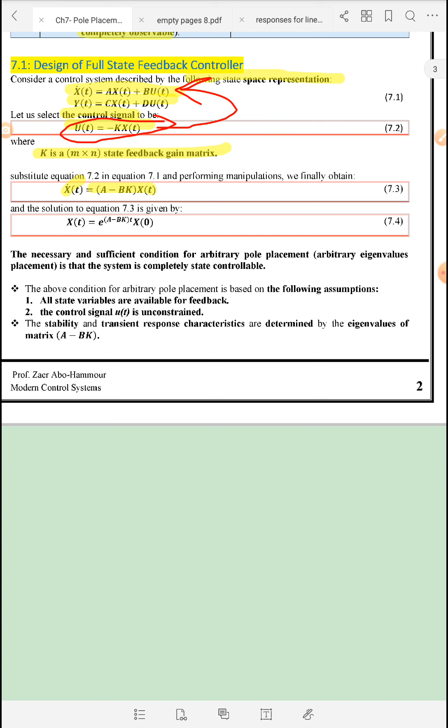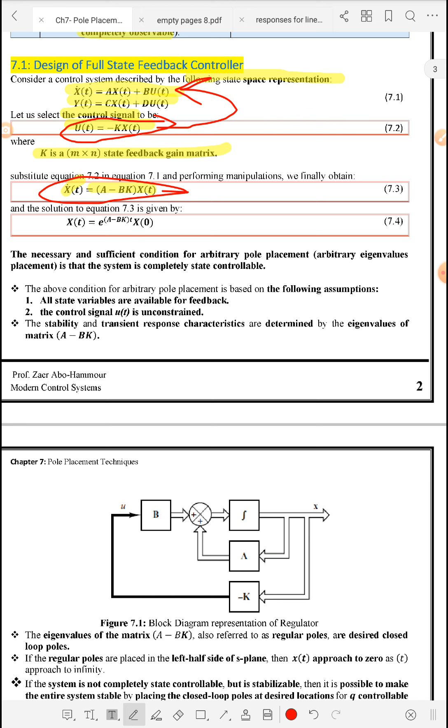So in this chapter we reached this equation: x dot is equal to (A minus BK) x of t. Instead of A in the previous chapter, we have A minus BK in this chapter. If we replace A with A minus BK, then the solution x of t will be e to the power (A minus BK)t x of 0, and the stability and transient characteristics are determined and controlled by the eigenvalues of A minus BK. Previously it was the eigenvalues of the A matrix, while here it's A minus BK. Why? Because we have assumed that u is equal to minus Kx.

And in order to perform this pole placement arbitrarily, so that you can select the desired closed loop poles anywhere in the left half of the s plane, there is a necessary and sufficient condition that the system should be completely state controllable. So the conditions that we discussed just now are based on assumptions. Number one, all of the states are available for feedback, and the control signal is unconstrained.

And this is the concept of controllability. If you remember, the concept of controllability in the previous chapter is to transfer all states from an initial value to any final value over a finite interval of time using unbounded u of t. So u of t is unconstrained or unbounded, and all of the states should be available for feedback. If they are not available for feedback, then we should use an observer.

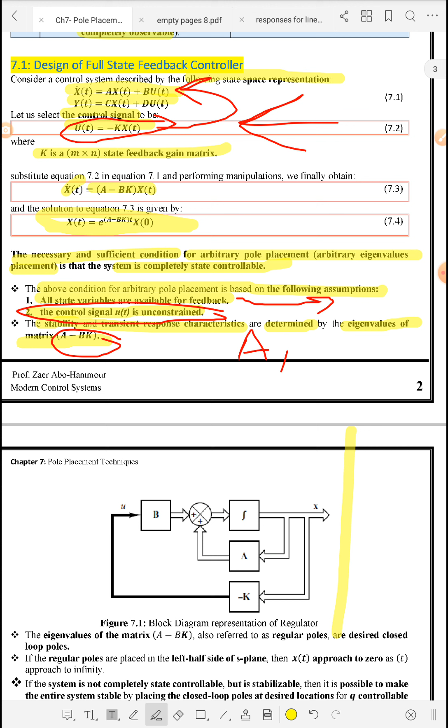And this is the block diagram of the system. Here we have x dot. So this is x multiplied by A, so here it will be Ax, and here x multiplied by K, and here u is equal to minus Kx, and we multiply this by B. So what will be the final answer? x dot is equal to Ax plus Bu, and u is equal to this value. So this is our model for the system that we assumed on the previous page. Okay.

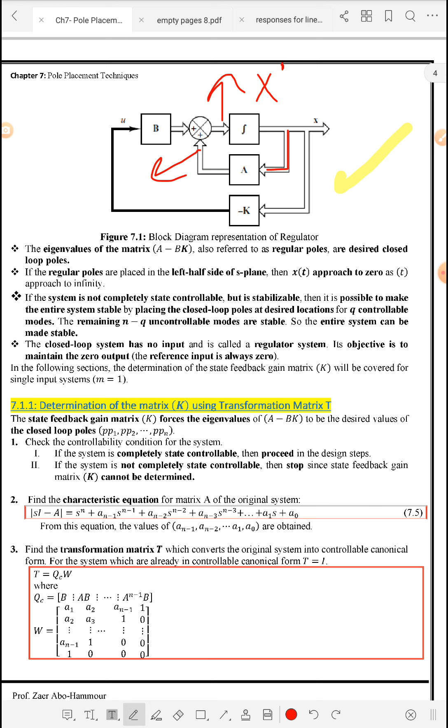Now, the eigenvalues of the matrix A minus BK, we call them the desired closed loop poles. Eigenvalues of the matrix A minus BK are the desired closed loop poles; we want to place the poles at this location. So if all of those desired poles are in the left half plane, then the system is stable, and x of t, due to initial states, will go to 0.

And if the system is not completely state controllable, but it's stabilizable, we discussed this concept, then we can make the entire system stable. How? By placing the closed loop poles at the desired location for the q controllable states, and the remaining states, which are uncontrollable, are already stable, so the entire system will be stable. And this we have discussed before in the concept of stabilizability.

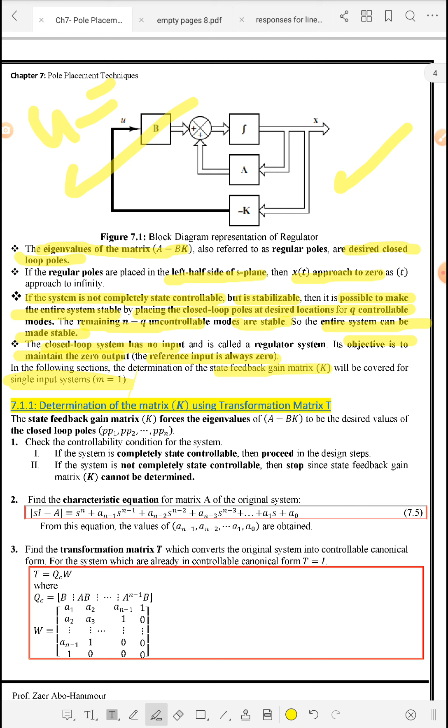Okay, and for this system, notice that the closed loop system has no input, because we have assumed that u is equal to 0, and we are considering the zero input response. So the objective of this system is that the output should be 0, and the reference, or the input, is assumed to be 0. So how can we determine the state feedback? In the following sections we will cover the procedures to determine the value of K, the state feedback, for single input systems.

Okay, so the first method is using transformation. The state feedback gain matrix K forces the eigenvalues of A minus BK to be the desired poles. So we place the desired poles from PP1, PP2 till PPN. These are the desired locations where we want our controller to set the new closed loop poles. We set those PPs from PP1 to PPN according to our specifications.

And the K value will force the old system, which has its eigenvalues of the matrix A, so that the eigenvalues of the new system will be the eigenvalues of A minus BK. In the first step, we check the controllability of this system. If the system is complete state controllable, we proceed. If not, we stop; we cannot determine K. The second step is to find the characteristic equation of the original system, the determinant of sI minus A, which will be nth order, and from it we determine all of the coefficients a0 till an minus 1.

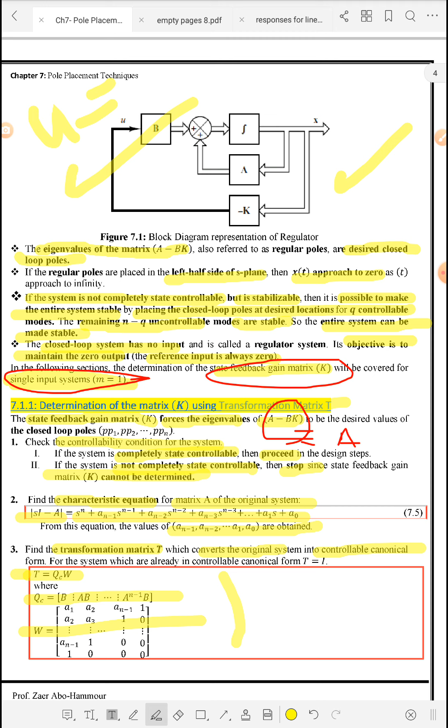In this step, we perform similarity transformation. We find the T matrix as we discussed in the similarity transformation. This is QC and this is W. I will not discuss it again. So we perform the similarity transformation that converts the original system into CCF, and we find this T matrix.

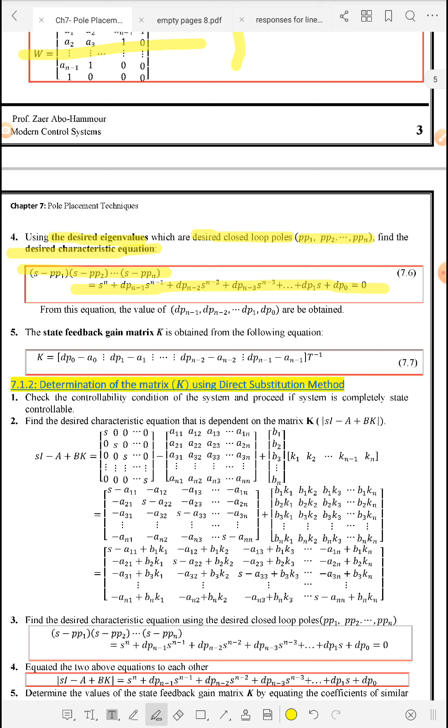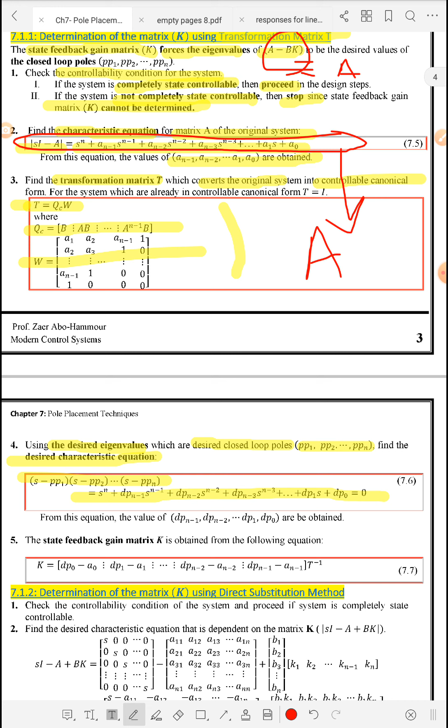In the fourth step, we find the desired eigenvalues. We have set the desired closed loop poles, which are the desired eigenvalues, and from PP1 to PPN we find the desired characteristic equation. So we multiply them, and from that we find the desired characteristic equation, the one we want. While this one is the characteristic equation of the original system before any controller, the old characteristic equation of matrix A, this new one is the desired characteristic equation after using the state feedback gain matrix.

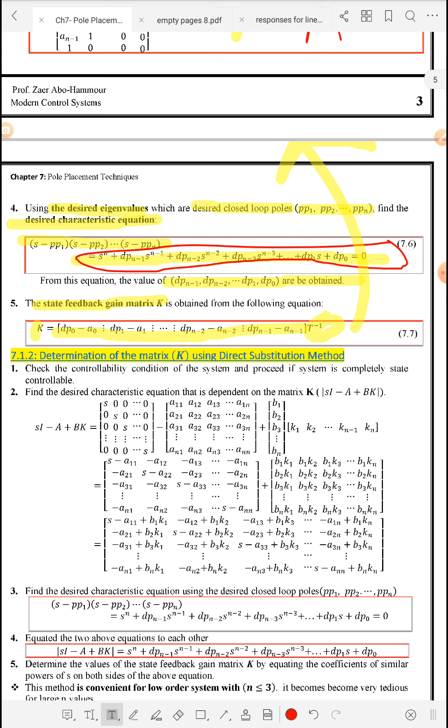And from that desired characteristic equation, we find the values of all the desired coefficients for pole placement. Finally, we find the state feedback gain matrix according to this equation: the differences between the coefficients of the desired and the original system, multiplied by T inverse, which we calculated in the previous step. So this is the first design method, based on the transformation matrix.

Now we will go to the second method, based on direct substitution. In the first step, we always check the controllability. If it is complete state controllable, proceed; if not, stop. So here, as I mentioned, A minus BK is the new system, with the new characteristic equation and new eigenvalues. We want to determine sI minus A plus BK, which will be a function of the K matrix. So this is sI, this is minus A, here B, and here K. Finally we get this lengthy matrix, and we find its determinant.

And in the third step, we find the desired characteristic equation based on the desired location of poles from P1 to Pn that we set. These poles we set, we specify. Okay, and from that we have this desired characteristic equation with coefficients dp0 till dpn-1.

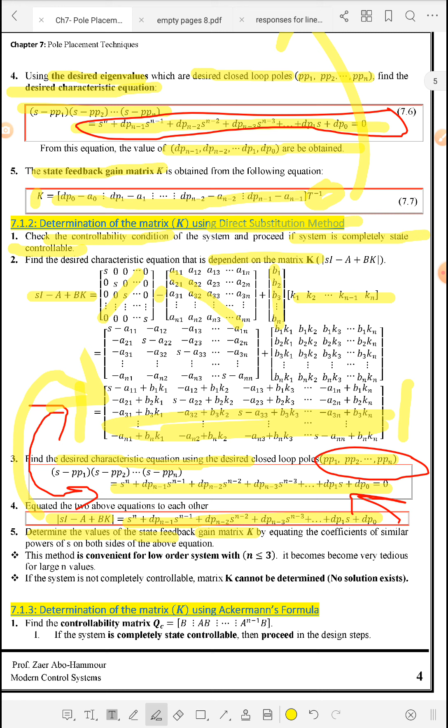And then the final step is to equate the characteristic equation that we get from this with the characteristic equation that we get with this. So here we will equate the two characteristic equations. This is the characteristic equation that we will get from here, the determinant of this, and this is the desired one from this step. We will equate both of them, and we will determine in the fifth step the gain matrix K based on equating the coefficients of similar powers of both sides of the equation.

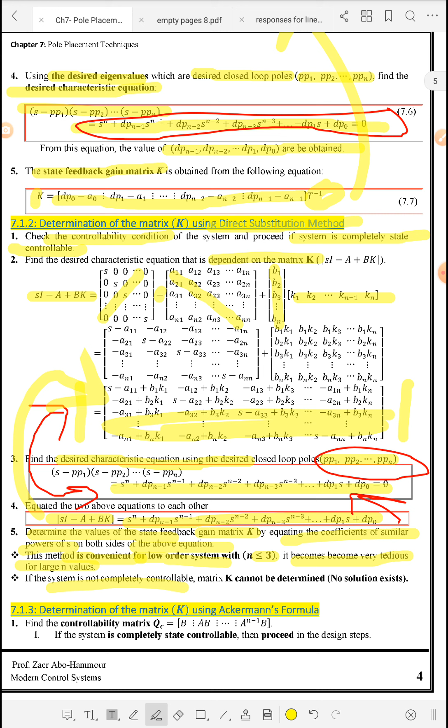Okay, so we will generate a system of n equations. The system will be n-dimensional, and we solve it and we find the unknown values for K from K1 till Kn. And this method is convenient for low order systems, n less than or equal to 3. If it is larger, it will become very time consuming. And if the system is not completely state controllable, then K cannot be determined because no solution exists. So this is the second method of determining the state feedback gain matrix.

The third method is based on Ackermann's formula. Always we start with the controllability matrix, and if it is completely state controllable, proceed. If it is not, stop. The second step, we find the desired characteristic equation based on the desired poles, which I have discussed before. And in the third step, we find a new matrix, its name is phi(A). How can we get it? It's based on this desired characteristic equation.

But we get it by replacing each s in this characteristic equation by matrix A. So each s in the desired characteristic equation is replaced by matrix A. And if we replace it, we will get this phi(A). So s to the power n will be A to the power n, and we continue till this term, dp1 A. And finally, we reach this one. This is very important: here it's dp0. We cannot add dp0 because it is a scalar, so we should multiply it by the identity matrix. In is the identity matrix of size n. We multiply the last term with In.

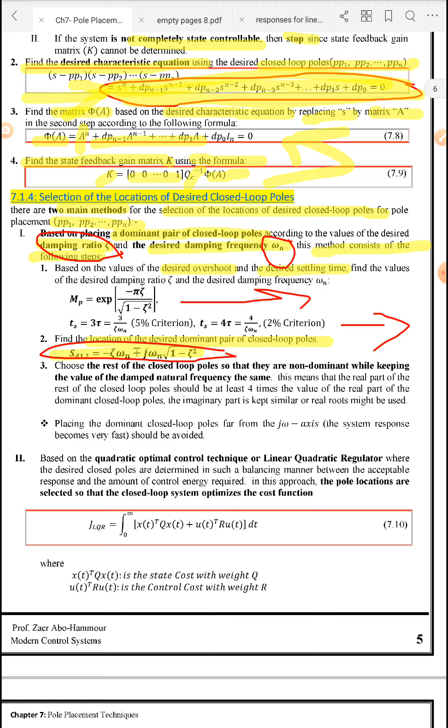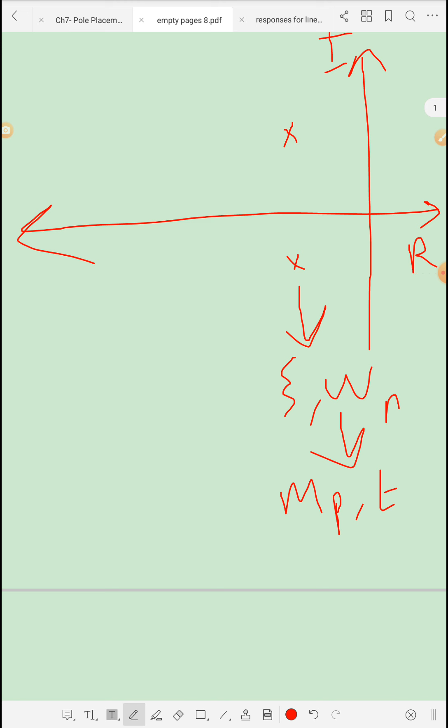So assume that our system has n poles. Assume that this is the real axis, and this is the imaginary axis. Assume that we have specified here and here the desired closed loop poles based on zeta and omega n, which we calculate based on Mp and ts. So those are 2; there are n minus 2 poles left.

How to specify them? We should find the real part of those dominant closed loop poles, and the real part of the non-dominant n minus 2 should be at least 4 times the real part of this pair of dominant closed loop poles. So assume that the real part of this desired closed loop pole is alpha. Then we might place the remaining, whether real roots or complex conjugate roots, with real part at least 4 alpha. It might be further to the left, but it should not be closer, because if it is closer, that pair will be non-dominant.

So we want to guarantee the dominance, and to guarantee it, the real part of the non-dominant poles should be at least 4 times the real part of the dominant ones. I hope everything is clear; we discussed dominance and non-dominance in the control course. So in the third step, we choose the rest of the poles, n minus 2, such that they are non-dominant regarding the real part, while their imaginary part we might keep the same.

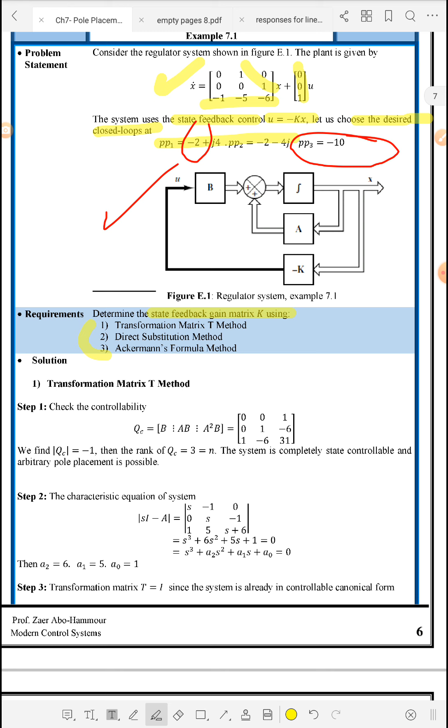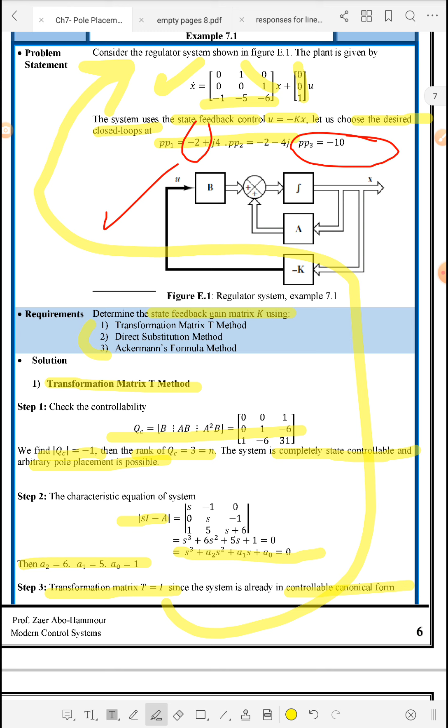The first one is the similarity transformation. So we find the QC and its rank; it's full rank. The system is completely state controllable, and we can proceed. After that, we find sI minus A, and this is the characteristic equation of the original system, and from that we find a0, a1, a2. Since the system here is given in CCF form, T is equal to I. So we will continue the solution.

So we go to the fourth step, the desired characteristic equation. We multiply s minus p1, s minus p2, s minus p3, and we get this equation, and we equate it to the desired coefficients, and from that we get them. And the gain matrix, as I discussed in the previous method, is the difference between the respective coefficients of the desired and the original multiplied by T inverse, and T inverse in our case is I, so k is equal to this vector.

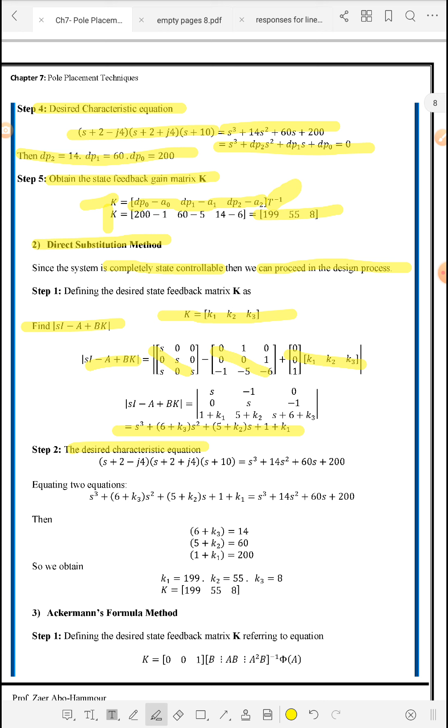So now we will go to the direct substitution method. Again the system is completely state controllable, so we can proceed. The state feedback gain matrix is k1, k2, k3, and we find sI minus A plus Bk, and we will finally get this determinant, the characteristic equation of the desired location. And the desired location is s minus p1, s minus p2, s minus p3 multiplied, and we will get this. So we will equate both of these equations.

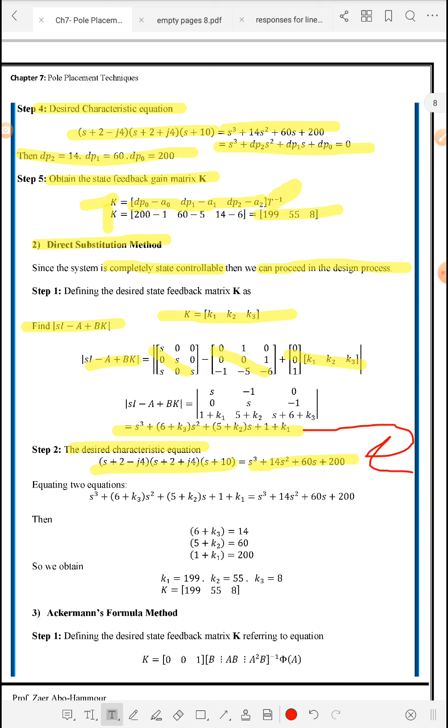So this is the complete numerical value, and this is the characteristic that contains the k's. So from this we will get those three equations, and from that we will get this k, and the k here is equal to the k in the first method. The state feedback gain matrix should be the same regardless of the method.

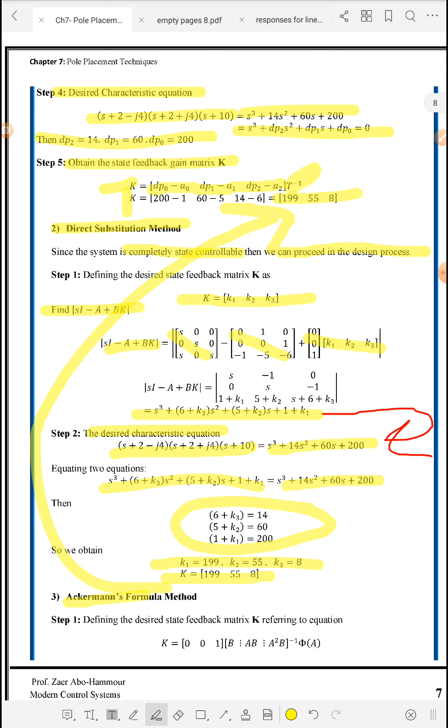So the final method is the Ackermann formula. The desired characteristic equation, as we say, we will calculate like this, and we will replace each s by matrix A in this desired characteristic equation according to this method. We replace each s by A, and the final term we multiply by I in order to be added to the matrix. So finally, we get this phi of A, and this is the QC, and this is the QC inverse, and finally we will have this formula, and if we multiply we will get this.

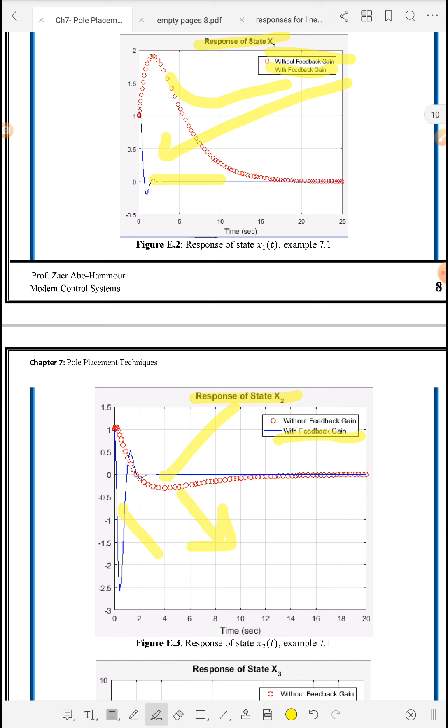So these figures are the responses of the respective states. Here state 1: this one is without state feedback, while the solid line is with feedback. As we see, it's much faster, and it's a very good response for x1. And for x2 also, this is without state feedback, and this blue one is with feedback. So again, it's much faster and much better. And if you go to the third state, this is with feedback and this is without feedback, and the design is over.

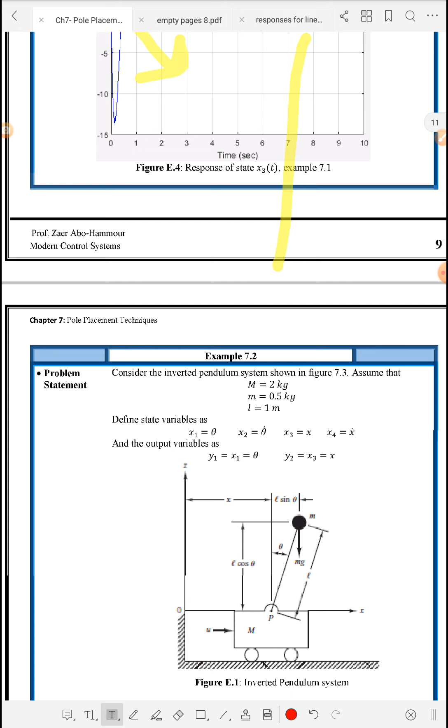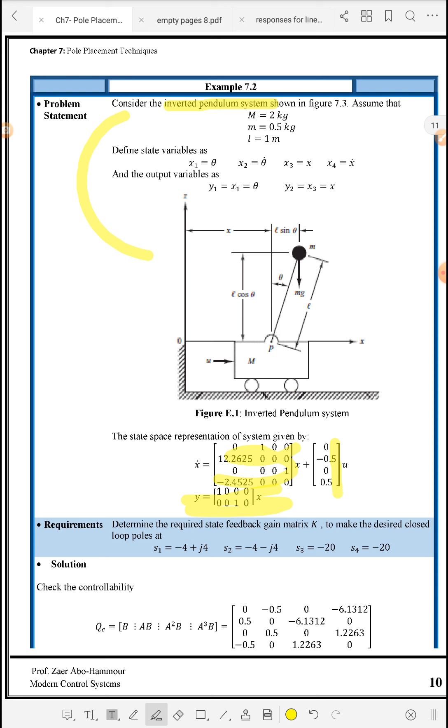So we will go in the next example to the inverted pendulum example. This is a realistic example, and this is its modeling process. It should be covered in the modeling and simulation course. So it's a 4x4 system here with one input and two outputs, and what's written? It's written that the desired closed loop poles are a dominant pair with real part of -4, while the non-dominant ones are real roots at 5 times this real part. And we want to find the value of the state feedback gain matrix.

So QC, we find it in the first step for all cases, and since the determinant of QC is non-zero, QC is full rank, the system is completely state controllable, and we can perform this pole placement technique. So the first method is the transformation method. We find the characteristic equation of the original system, and from that we find the corresponding a's, and we find the transformation matrix. Finally we will get this T. I will not go through details.

We have taken the similarity transformation. This will convert the system from any given form to CCF, and the desired characteristic equation is S minus P1, S minus P2, S minus P3, S minus P4, and from that we will find the desired coefficients. And finally, this is the formula for calculating the K. If we plug in all of the values, K is equal to this value.

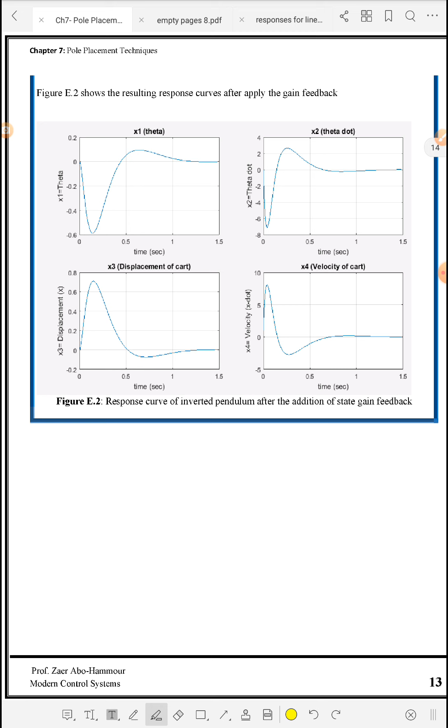And the third method is the Ackermann method, and this is the design rule. The desired characteristic equation is this, and phi A is based on the desired characteristic equation. Finally, phi A is this, and if we proceed, QC is this matrix, the inverse is calculated like this, and finally K is calculated according to the Ackermann formula. We reach this value, which is again the same as the previous values of K. And these are the responses of the 4 states: x1, x2, x3, x4.

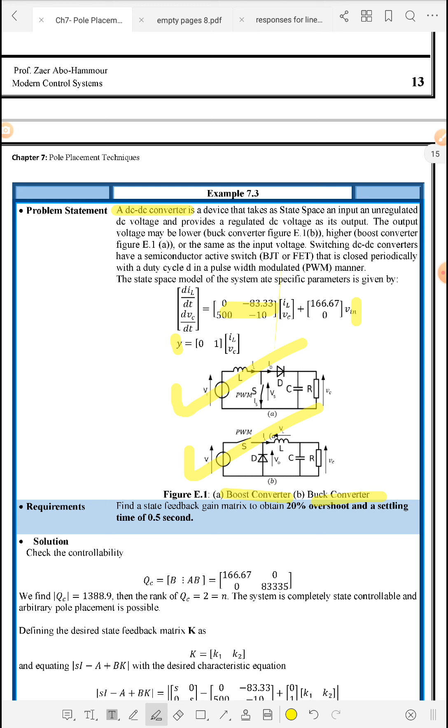And this is another example in electric circuits. This is the DC-DC converter, which might be a boost converter or buck converter. This is a buck converter, and it's a 2x2 system with single input, single output. So we check the controllability. QC will be 2x2, and it's full rank, so the system is completely state controllable. And K will consist of 2 values, K1, K2, since we have 2 states. And we find it using the direct substitution method, the determinant of sI minus A plus BK, and we will get this value.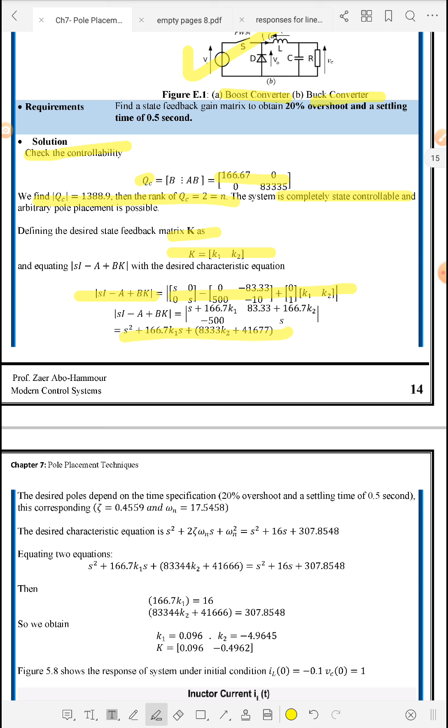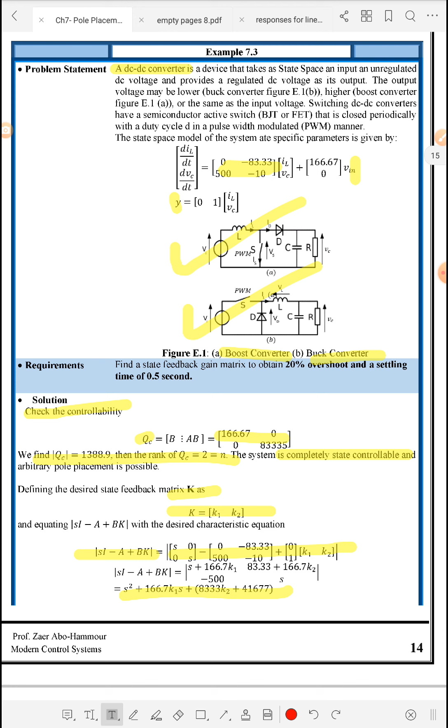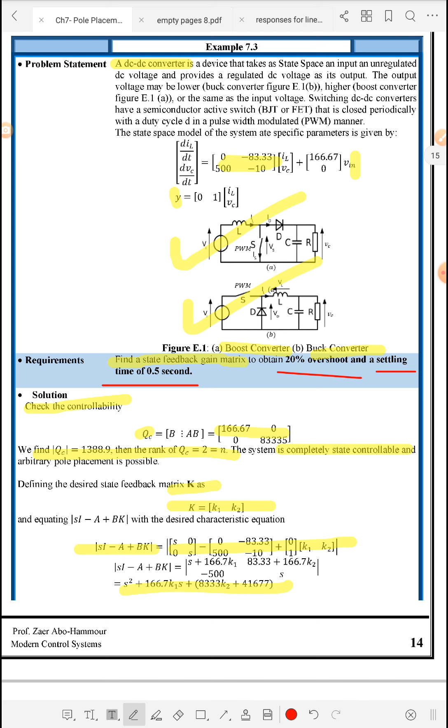And the desired one, if we go back to the problem statement, it's written that we design a state feedback gain matrix such that the overshoot is 20% and the settling time is 0.5. So here we have 2 states and no more, so the dominant closed loop poles can be determined directly from the overshoot and the settling time. Here overshoot is 20% and settling time is 0.5. So we find omega n and zeta from the previous equations, this is the desired characteristic equation, and we equate both equations.

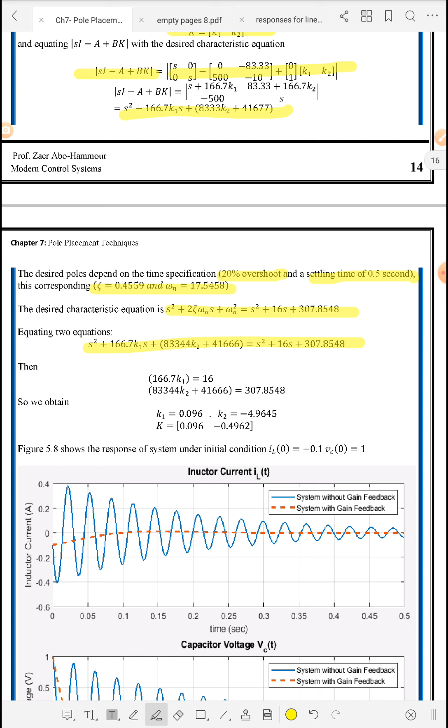From that we find the values of K1, K2, and this is the gain matrix, and these are the responses of the 2 states due to initial conditions. Here we have the initial conditions. The blue is without state feedback, without controller, and the red is with gain feedback. It's smooth, it's fast, and the same with the second state, which is the capacitor voltage. And in all of the previous examples we have 0 input, so it's due to initial conditions.

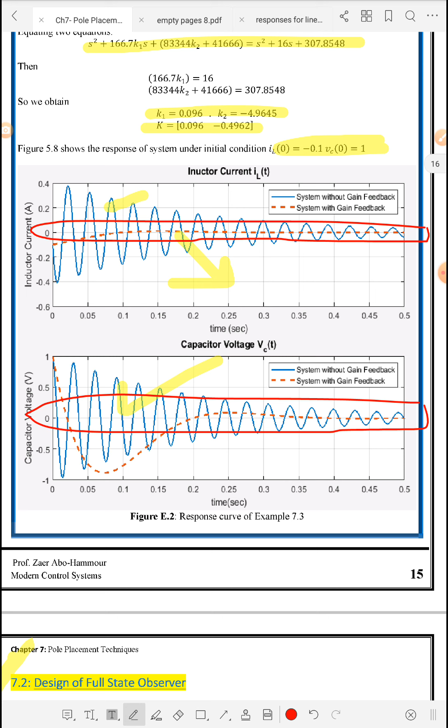And as we discussed in system stability, whether in the conventional course or in the current course, if we excite any stable system by a bounded initial condition, the response should go to 0 as time goes to infinity. And here the first state and also the second state are approaching 0. So this is a stable system. So in this way we have covered the pole placement technique, and in the next lecture we will cover the design of observers.